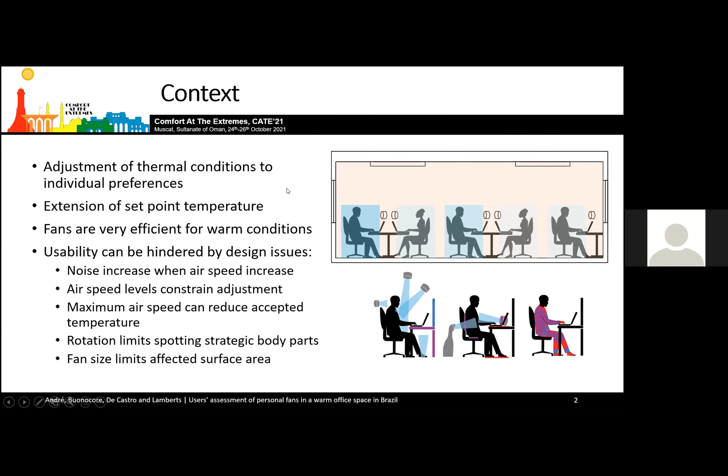So thanks for the opportunity for presenting this work. I will be presenting users' assessment of personal fans in warm offices in Brazil. The context of this work is the proposition of using personal conditioning systems in office spaces. This type of system allows us to adjust the thermal conditions to individual preferences. This way, we can adjust the microclimate around the person and its occupancy zone and extend the temperature of the room, allowing also to achieve some energy savings.

In this context, there are a lot of different types of personal conditioning systems that have been studied in the last 10 years more frequently. And for this study specifically, desk fans were chosen because in warm conditions, they seem to be one of the most efficient equipment to condition people in this kind of spaces. However, the approach used here is considering that design issues can hinder the usability of the equipment. So when we want to achieve a better thermal condition for the occupants and the extension of set point temperature of a cooling system, we have to assure that this usability won't be a barrier for its use.

So previous studies show that we can have some noise problems regarding the use of fans. Also, the maximum airspeed that the equipment can achieve can also limit the acceptable indoor temperature of a room. The vertical rotation of the equipment is also important if we consider that there are some spots of the body that we can direct it to reach a higher effect on the whole body thermal sensation. And also the size of the fan and its shape can limit the effect on the maximum surface area that we can reach.

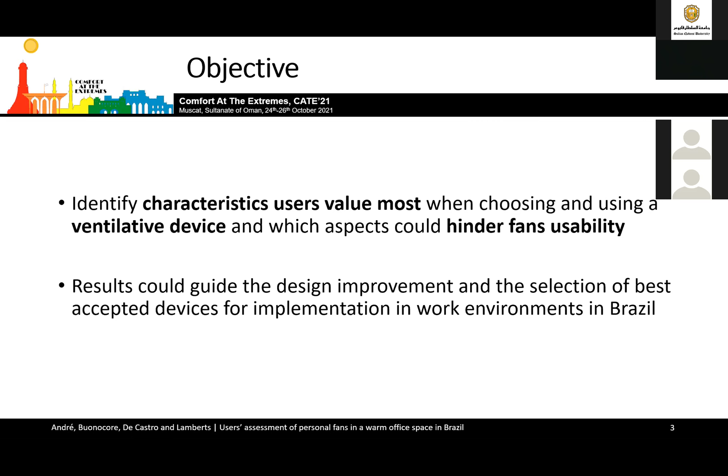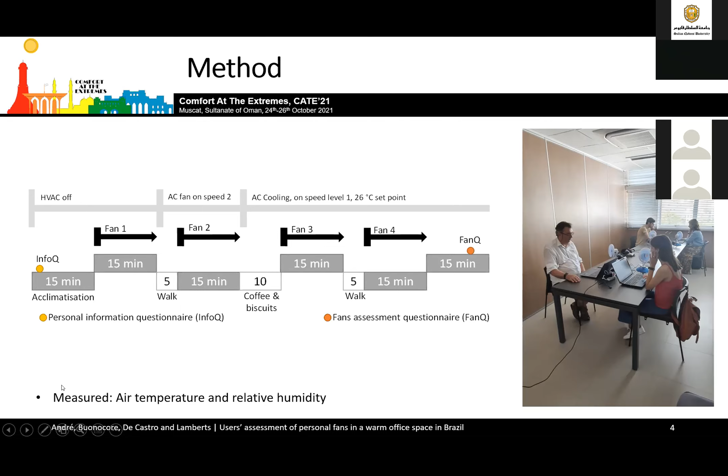And to do this, the study was based on an experiment in a controlled space. The experiment was performed with 4 people at a time, and they were asked during this experiment to use 4 types of fans during a similar period of time, and the conditioning of the space was changed during the experiment. Initially, we had like a dead band. Then the fans of the HVAC were activated, and at last the cooling system was activated with a 26 set point temperature. At the beginning of the experiment, they were asked to fill in some personal information in a questionnaire, and at the end, they were asked to assess these 4 fans by comparing them. Also, while the experiment was run, we were measuring air temperature and relative humidity.

These were the 4 types of fans that they were assessing. They were chosen regarding their differences in control opportunities, like the speed level. They had different types and numbers of speed level control. Also, the maximum airspeed of each of these equipment was different. The sound power was measured in a laboratory space, and they had also different dimensions, which is related to the airspeed and the surface that could be reached by the equipment. And they have also different aesthetics. And the last equipment, D, was an evaporative cooling device, so it was slightly different from the others.

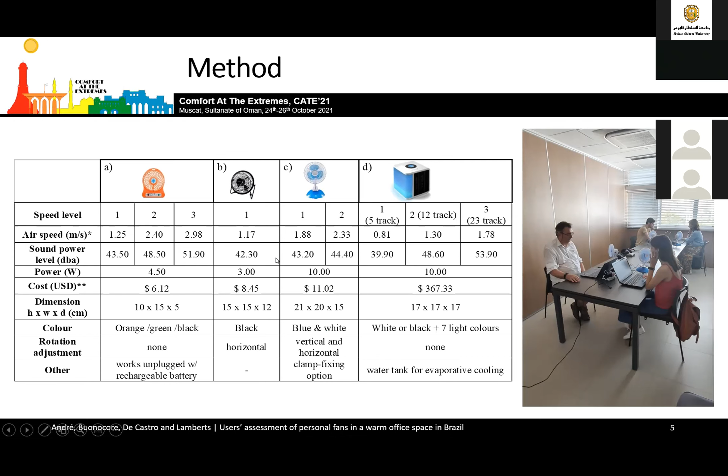The participants were chosen to be a very heterogeneous group. We have 40 participants, almost half were women and almost half were men, slightly more men than women. And they were separated by age groups, as you can see here. And also their BMI, their body mass index, was calculated afterwards with their anthropometric data. And we can see that there were more people classified as having a normal BMI than the other 2 categories.

And these were the mean indoor air temperatures and relative humidity. We had high, but not the highest temperatures that we can reach here in this region of Brazil. And also we had an average high relative humidity inside the room.

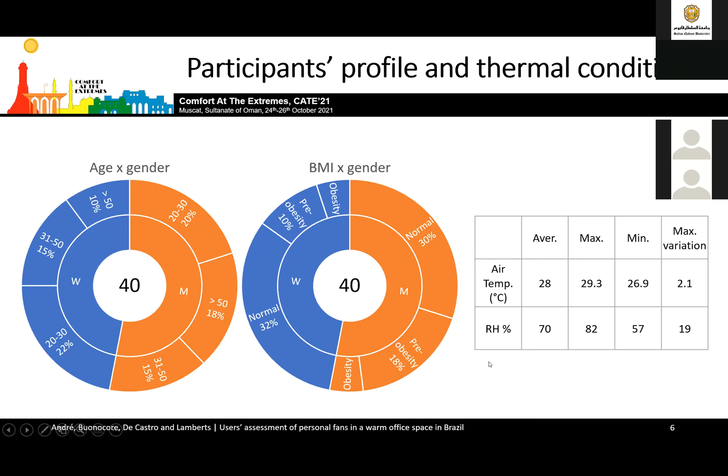So the initial results that I'm showing right now compare the previous willingness of the participants to use fans in their workspaces. And most of them tend to use air conditioning in their workspaces, and indicated they would prefer to use more natural ventilation. But there is a small sample that indicated they usually use fans or prefer to use fans.

And at the end of the experiment, we asked this question again: what do you prefer to use in your workspace? And we can see here that the experiment had a positive impact on the participants. A large group indicated they would like to have natural ventilation with fans, and a new group that wasn't included in these other graphics indicated they would be able or prefer to use desk fans with the air conditioning on. And this is very interesting because they weren't used to having this control mode, and they were considering this to be a preference at the end of the experiment.

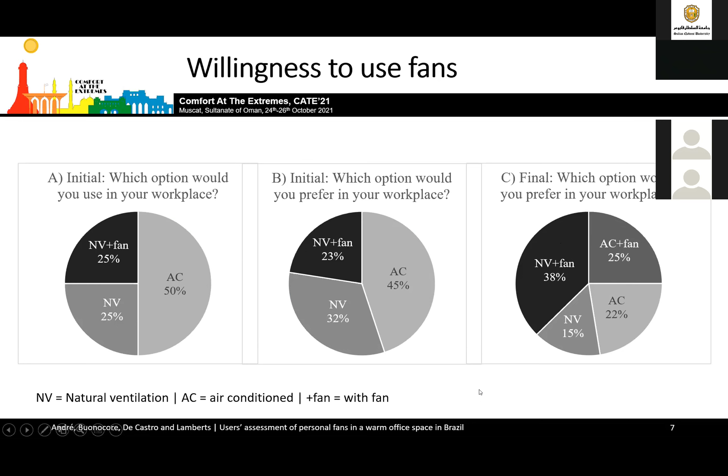The other important thing is the criteria they consider the most important. So this graph shows the rating of the criteria which they found most important. And we can see here that the top two are related to air movement and speed adjustment. This was expected considering we are assessing fans, but they also indicate noise level as the third most important. And we can see here rotation is an important aspect, and financial aspects were considered important too.

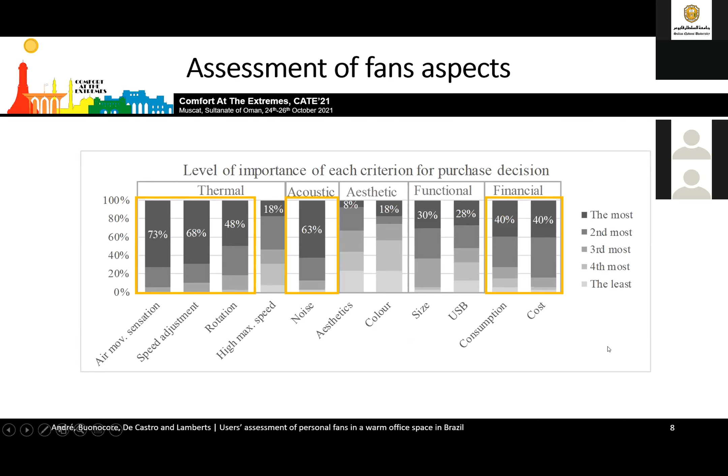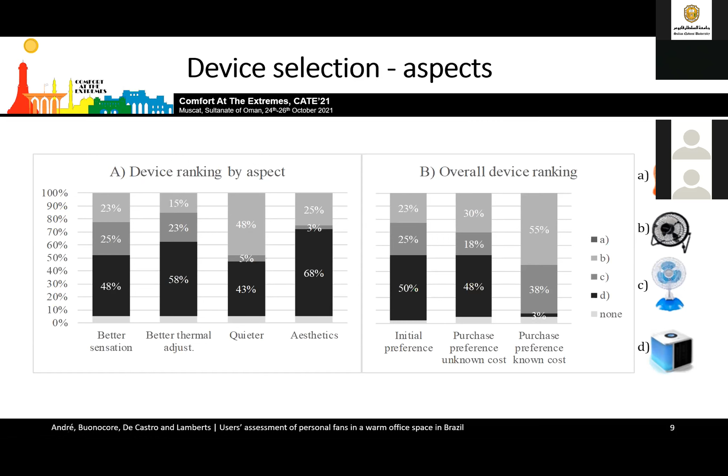And then to better understand this situation, we related this last choice, or the almost last choice, disregarding the prices, with the anthropometrical data. And we can see here some tendencies. Regarding the age, we can see that younger people prefer D and B, and fewer people prefer option C, and older people seem to prefer option C a little bit more than B.

Regarding the gender separation, we can see that men have a very equal preference regarding these three options, while women prefer option D more often in this sample. And the other part prefer option B. There is a small part of women that preferred option C. And regarding the BMI, we had a lot of people in the normal category. So most of them preferred option D or option B, and a lower number preferred option C.

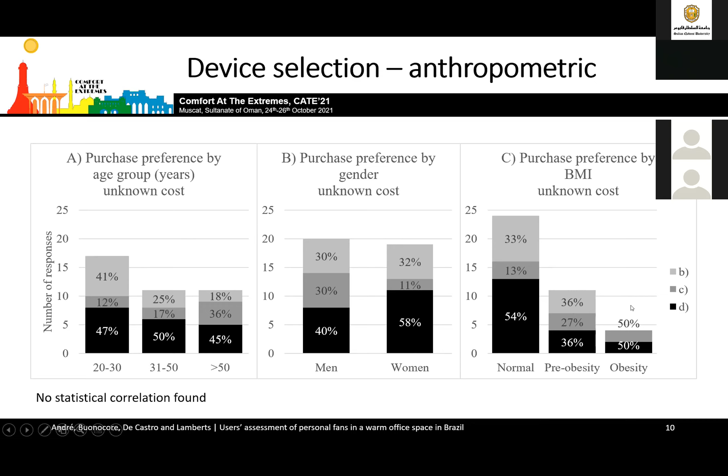No statistical tendencies regarding the anthropometric data. So we can affirm that option B and C could be applied to office spaces much similarly. So to wrap up, we found out that controllability aspects are very important in the definition of this type of equipment and their design. Also, higher speed wasn't considered so important as would be expected, and people preferred a smooth and controllable air.

The noise produced by the equipment is very important to be considered, and the financial aspect can be an eliminatory criterion if the occupant is also the owner of the equipment. And the possibility of using desk fans with air conditioning wasn't a usual condition for participants, but they considered this a good opportunity at the end of the experiment.

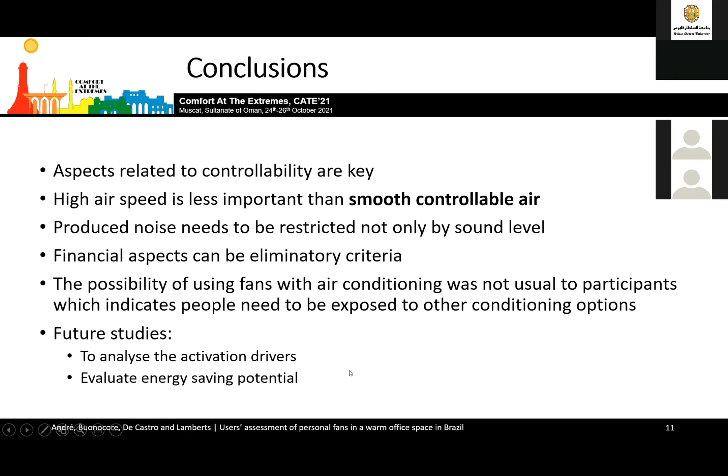So we think they have to be exposed to more options of control and control modes to be able to use that option too. And for future work, we will consider activation drivers that were included in the experiment. And we are also doing an energy savings potential analysis in another article regarding the use of personal fans.

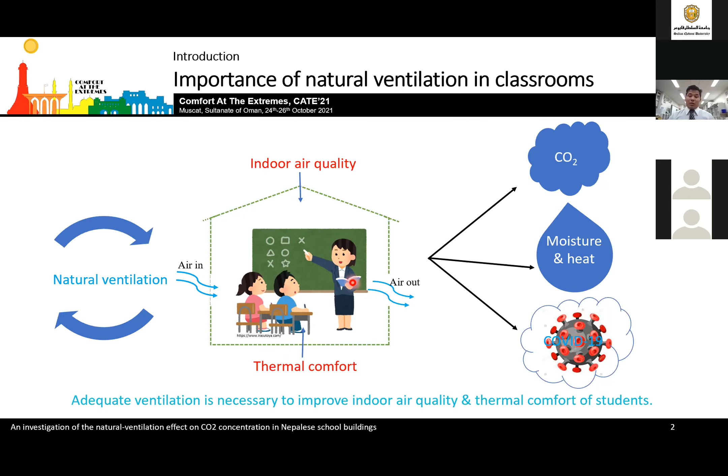Natural ventilation uses wind forces to let fresh air in and dilutes indoor air contaminants like CO2, moisture, and heat. Looking back at the 2020 academic year, until today we are suffering from the COVID-19 pandemic, and school communities were closed to reduce the risk of COVID-19. It is said that natural ventilation could be an effective on-site sustainable mitigation strategy to be safe from such diseases, improve indoor air quality associated with CO2 concentration and ventilation, and improve the thermal comfort of the students.

In the context of Nepali school buildings, most rely on natural ventilation. No heating and cooling systems are provided in the classrooms, and windows are the major source to ventilate the air. As shown in the pictures, just big windows are provided in the classrooms. In those classrooms, CO2 concentration and ventilation associated with indoor air quality have not been studied to date.

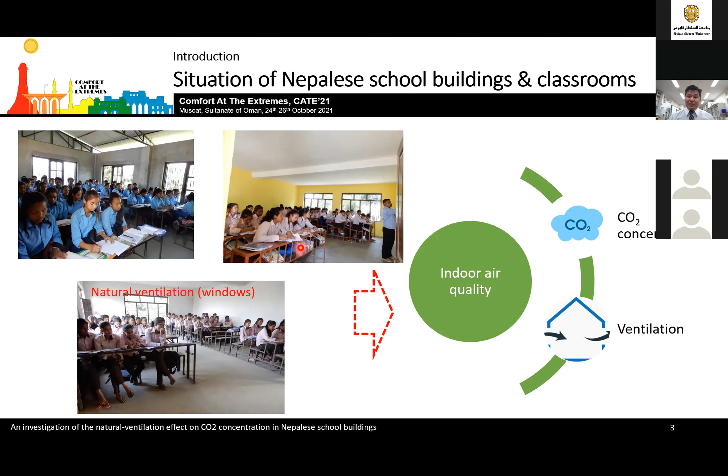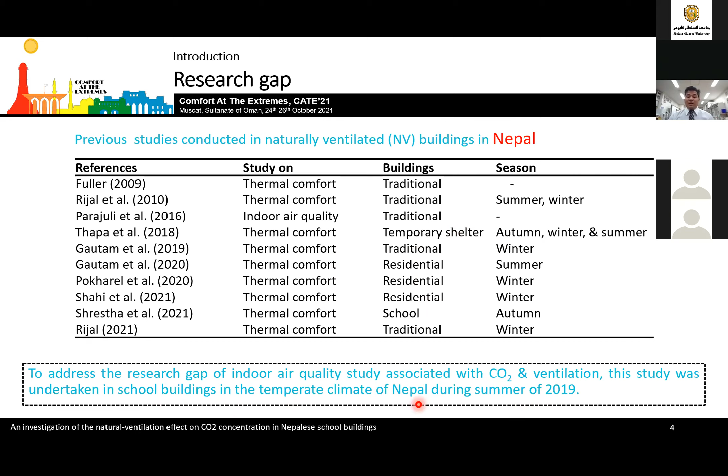Most of the studies conducted in Nepal are focused on thermal comfort in residential buildings. Very limited studies on thermal comfort in school buildings can be found, and no studies on CO2 concentration and ventilation are found in the Nepalese context. Therefore, to address this research gap, this study was undertaken in school buildings in the temperate climate of Nepal during the summer of 2019 with the following major aims.

In this study, based on the CO2 data collection, we analyzed the data. We have developed a model, and using this model, we estimate the ventilation rate and air change rate, and use it to estimate the CO2 concentration. Finally, we compare the measured CO2 concentration with the estimated CO2 concentration to check the model developed in this study.

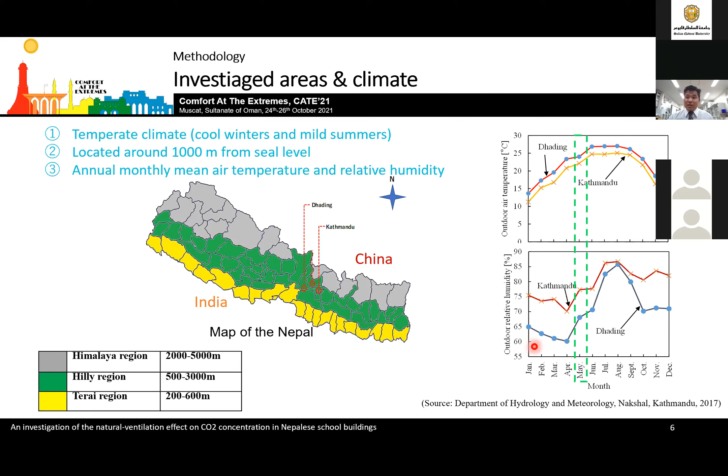This shows the map of Nepal, and the study was conducted in schools located in 2 districts in the temperate climate of Nepal. This diagram shows the monthly mean air temperature and relative humidity of the investigated areas. The hottest months are from June to September, and the temperature reaches its minimum from November to January. This study was conducted in May of 2019, and 3 schools and 7 classrooms were investigated, and all schools were naturally ventilated.

No heating and cooling systems were provided in those classrooms, and students from grades 8, 9, and 10, aged 12 to 18, participated in this study. This plan view shows the characteristics of the investigated classrooms in 3 schools, 7 classrooms, and the occupancy of the students was different from classroom to classroom, and the number of windows was also different

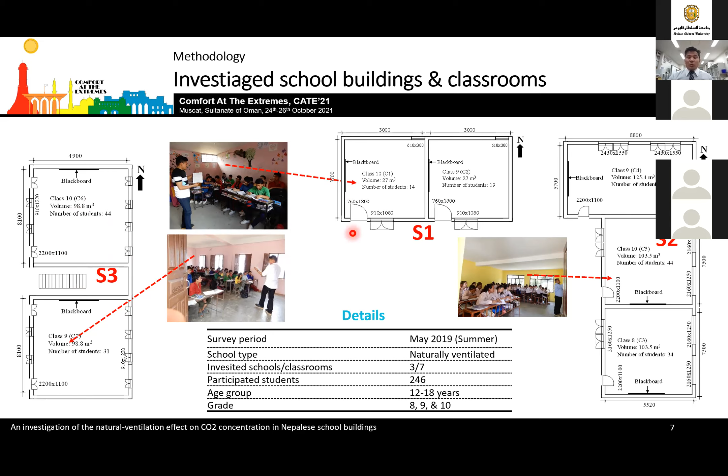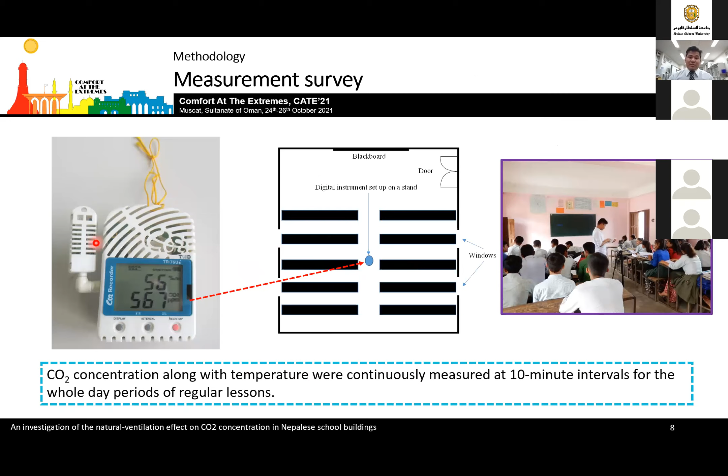from school to school. In this type of classroom, we measured CO2 concentration along with temperature at 10-minute intervals for the whole day period of regular lessons using this kind of digital instrument. In this study, we developed a model using a transient mass balance equation. The basic principle is that the CO2 going in and the CO2 emitted by the students must be equal to the CO2 stored inside the classroom and the CO2 going out. This is the very basic principle of mass balance.

Using this equation, we reduced it to an explicit type of equation, and we developed 2 equations, equation 1 and 2. Equation 1 is used to estimate the time-varying air change rate, and equation 2 is used to estimate the CO2 concentration. For equation 1, there is a constraint for time. The time period must be very small, and in our case we took a 30-second time interval.

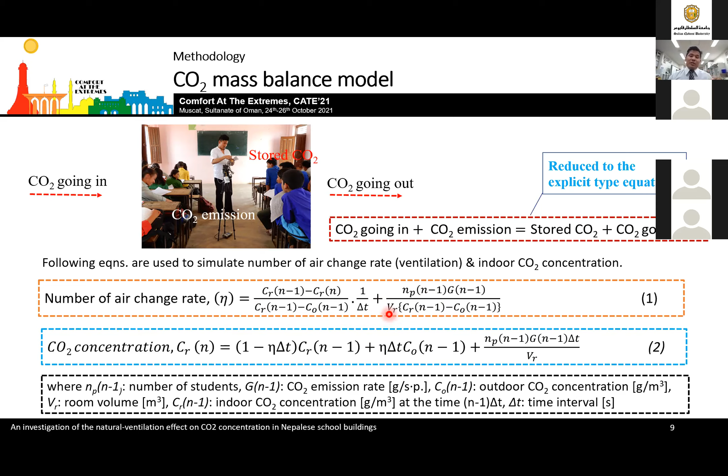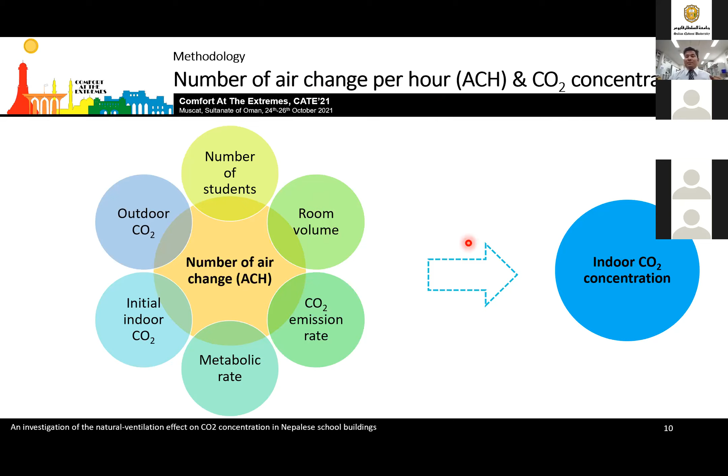To estimate the number of air changes per hour, we used these 6 factors: number of students, outdoor CO2 concentration, initial indoor CO2 concentration, metabolic rate, CO2 emission rate, and room volume. Using these 6 factors, we estimated the air change rate, the ventilation, and we used it to estimate the indoor CO2 concentration.

Here are our results. The first figure shows temperature versus time in 3 schools, 7 classrooms, and outdoor temperature and indoor globe temperature are plotted here. From these 3 graphs, we can see that the outdoor temperature is very close to the indoor globe temperature, and the temperature increases, becoming higher during the daytime.

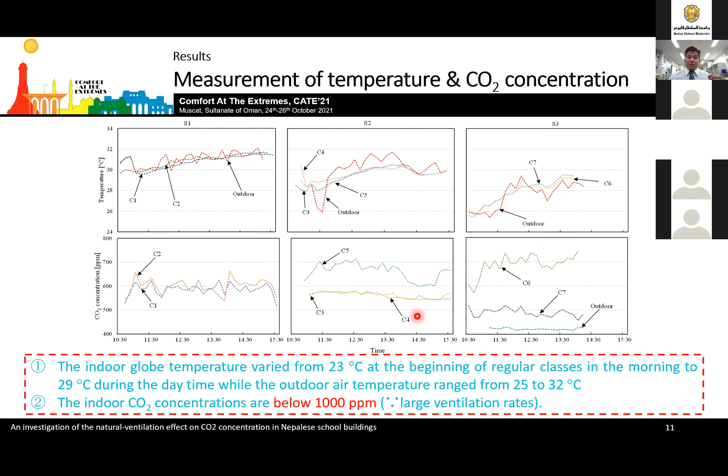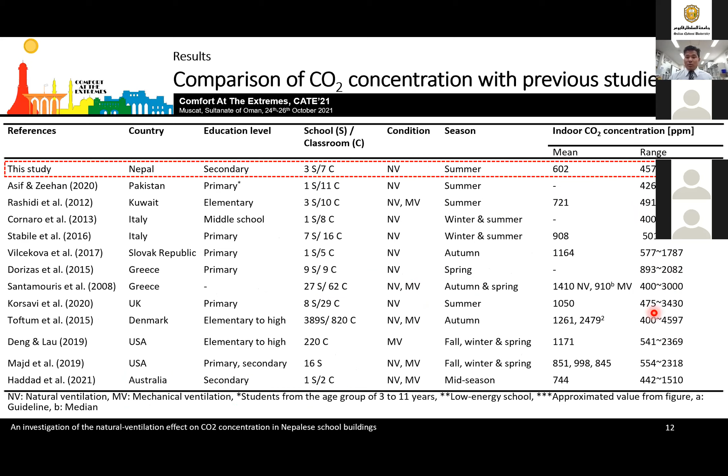The second figure shows the CO2 concentration versus time. In 3 schools, 7 classrooms, we found the CO2 concentration was below 1000 ppm. This must be because of natural ventilation and large ventilation rates, as I explained before, just open windows, and also cross ventilation may be the reasons for such low indoor CO2 concentration. Compared with previous studies, we found a very low range of CO2 concentration in the investigated school buildings. In previous studies, even when naturally ventilated, CO2 concentration was found higher than 2000 ppm.

For example, in school 3, both classrooms C6 and C7 are similar in dimensions, shape and size, but the difference is only in occupancy. In C6 there was higher occupancy in comparison to C7. Higher occupancy is connected with more CO2 generation. More occupancy, more CO2 generation. So more CO2 generation indicates the ventilation rate is low. That is one of the reasons for school 3.

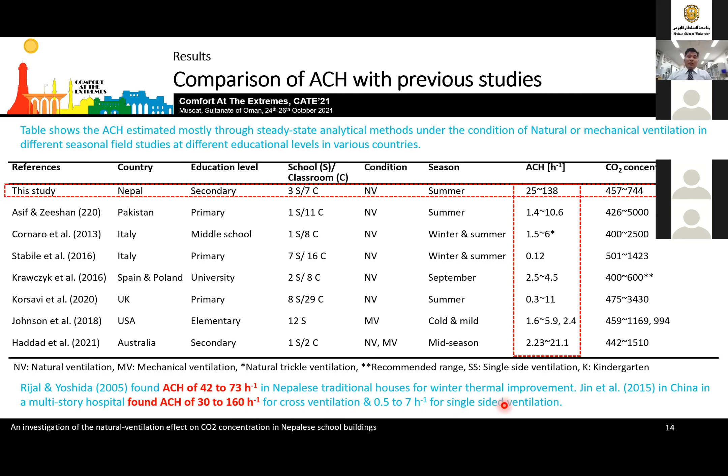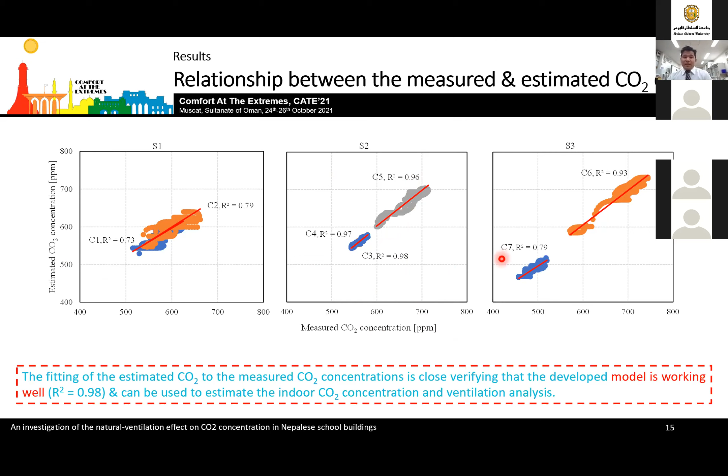And this model can be used in the future for further study and analysis. And here are our conclusions. The measured result showed that the indoor CO2 concentrations were within the acceptable limit. This shows that Nepalese school buildings have the potential to provide appropriate indoor air quality associated with ventilation and CO2 concentration. And the ventilation rate was higher than 25 times per hour.

And this showed that the investigated Nepalese school classrooms have the potential to provide adequate ventilation during the summer season. However, for the winter season, it may not be suitable for the students. Such high ACH or ventilation could be problematic to the students. Therefore, the winter season needs to be investigated in the future.

And last, the estimated indoor CO2 concentration fit well with the measured CO2 concentration. This confirmed that the method developed is accurate for the estimation of CO2 concentration and ventilation analysis. Overall, the findings of this study should be useful not only for Nepalese school buildings but for those located in climates similar to Nepal, for the evaluation of the indoor air quality associated with CO2 concentration and

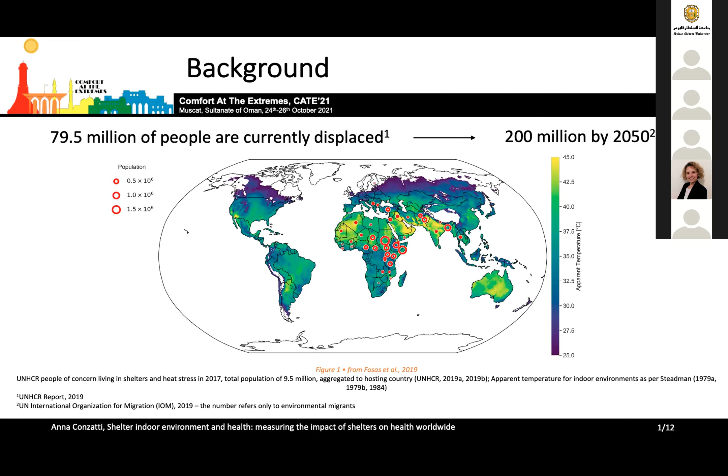represents comfortable conditions. The image from a recent study by Fosas showed the distribution of UNHCR people of concern living in shelters and heat stress, and it's evident that the majority of households living in shelters are subject to high levels of heat stress. However, heat stress is only one of the risk factors that jeopardize refugees' and IDPs' health, because, for example, harsh climatic conditions, lack of WASH facilities, and poor shelter quality are important determinants of health, especially in

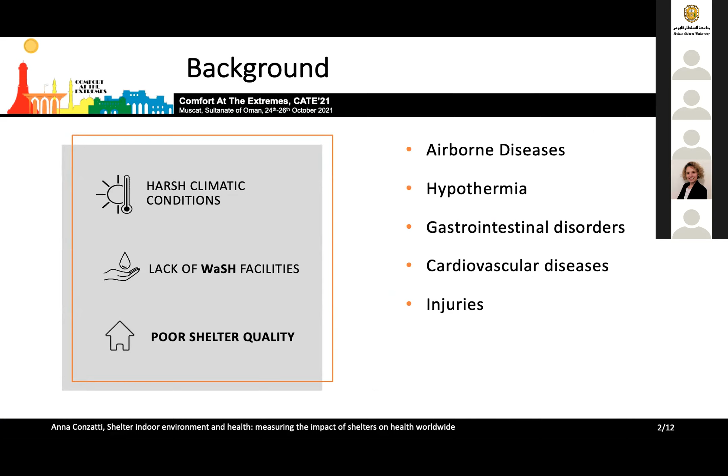the case of displaced populations, where these factors contribute to the development of specific health diseases, such as airborne disease, hypothermia, gastrointestinal disorders, cardiovascular issues, and injuries, all of which result in a reduced life expectancy, especially for children under 5 and the elderly. From a preliminary review of the literature, it has been clear that very little has been done to address the link between shelter and health.

Therefore, a bibliometric and systematic literature review followed by a comparative review has been conducted. The results of the bibliometric review have shown that there are 4 main clusters of research concerning shelter and health. Existing literature has also observed that shelters are fundamental determinants of human health, and they present some issues related to certain health diseases. For example, overcrowding was mainly related to sleep deprivation and in general any infectious disease, and air quality was related to respiratory infection, which represents a threat, especially for children under 5. Very little is known about the relationship between extreme temperatures in shelters and health.

Shelter generally consists of a single room where all the activities take place, such as cooking and sleeping. Therefore, indoor air quality can be poor due to the presence of cooking fuel or dust, and moreover, due to low airflow rates and the lack of pipes or chimneys. All of these factors determining poor air quality are also interdependent.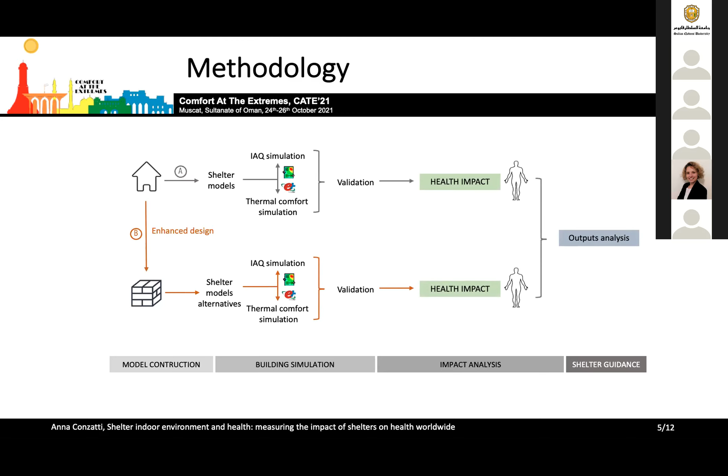For this preliminary study, shelters in Hitsats refugee camps have been monitored for 15 days. Temporary shelters constructed in Hitsats were rectangular shaped and constructed with hollow concrete block walls and corrugated galvanized iron roof. Both the door and the window on the same side had CGI shutters and were usually kept closed during the night due to the fear of theft and security reasons.

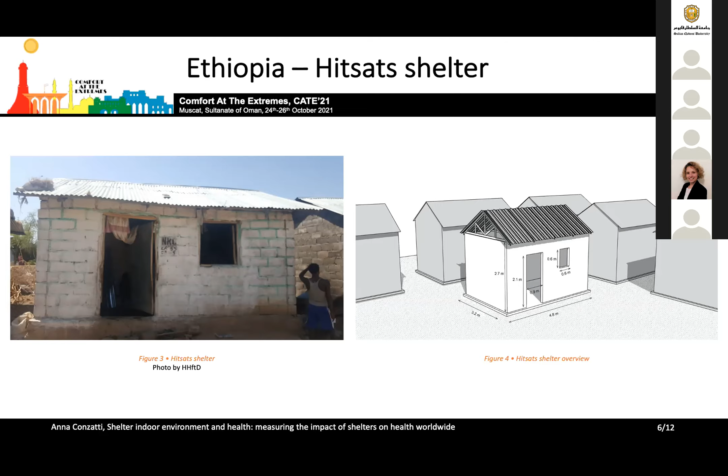Furthermore, due to the lack of overhanging shades over windows, some families had to close the windows during the day to avoid direct sunlight inside the shelters. Therefore, they reduced the amount of airflow inside the shelter. And this study assumed that the window is open during daytime and closed during nighttime. Because windows were kept closed during the night, ventilation rates were assumed to be approximately the same as infiltration rates.

The study focused on Hitsats refugee camps because shelters in that area were highly overcrowded and refugees used to cook indoors using traditional charcoal stoves several times during the day. And they also used to shut windows during night and occasionally during daytime. Besides, the camp was exposed to the hot desert climate and refugees reported living in discomfort.

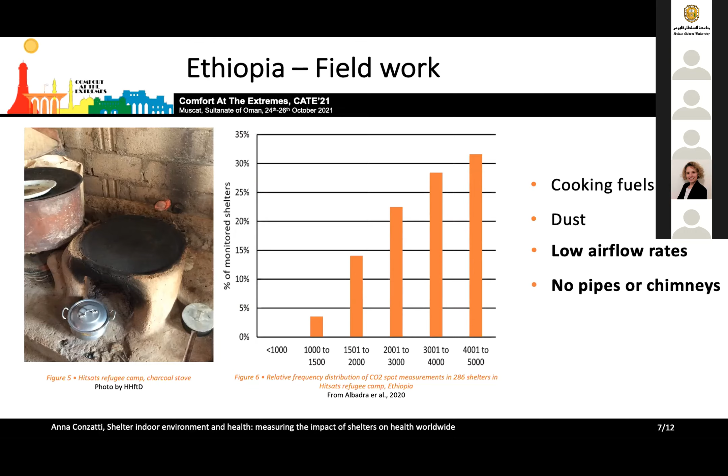Therefore, CO2 has been measured for 15 days, and during the field work it has been observed that poor levels of air quality were mainly due to cooking fuels, dust, low airflow rate, and absence of pipes and chimneys. These two last factors are the most important when investigating the impact of shelter design on human health.

The ideal procedure for obtaining a comprehensive analysis of indoor air quality involves recording all the indoor contaminant concentrations through the use of sensors and the direct monitoring of pollutants emitted by the source of cooking. However, in that case, owing to the unpredictability of field work in refugee camps, such as limited access time and mistrust in monitoring equipment, these procedures were too expensive and not adapted to extreme locations such as refugee camps.

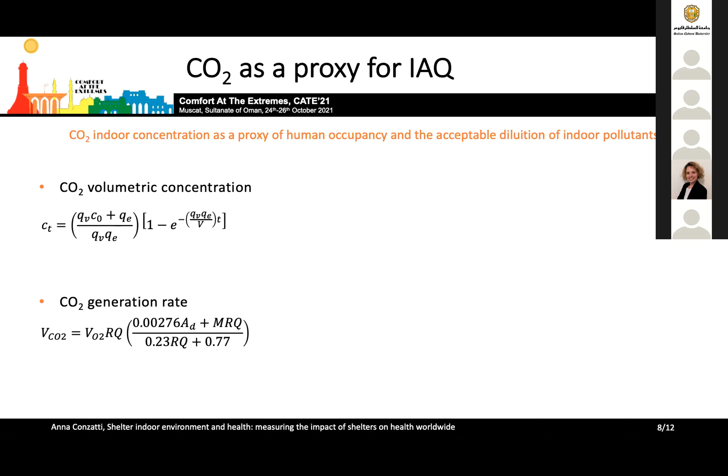Therefore, a simplified approach using ventilation effectiveness to identify the acceptability of indoor air could be suitable when working in displacement settings. So the study was performed using CO2 indoor concentration due to occupancy as a proxy of ventilation rate. Then, through the use of building simulation, it was possible to construct a model of the shelter in Hitsats, predicting the shelter behavior in terms of indoor air quality and pollutant concentration, as well as thermal comfort.

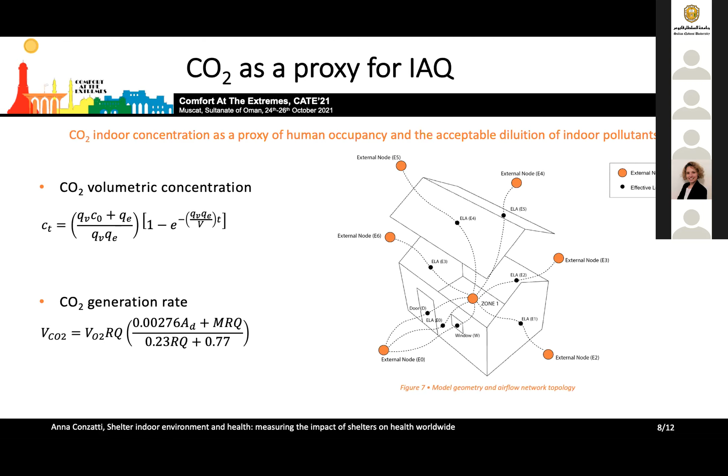So preliminary results show a comparison between two shelter models, the control shelter and the shelter with an improved airflow. And the control shelter shows that shelters do not provide the minimum air exchange to maintain the maximum permissible CO2 concentration level as per ASHRAE, so it's 1,000 ppm. Therefore, occupants are exposed to excessively high levels of indoor pollutants, and they are potentially exposed to indoor air-related health issues, especially during nighttime, when the windows are shut.

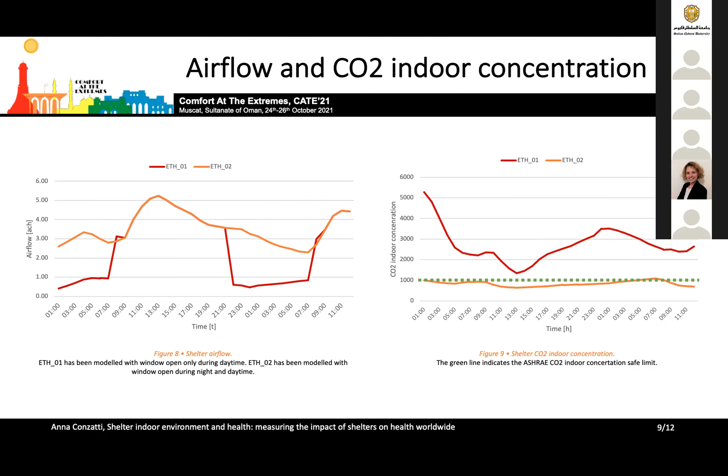However, as can be observed from the orange line, by applying simple design improvements, the airflow can be enhanced and the levels of indoor pollutants reduced. For example, increasing the airflow rates during the night seems to be one of the possible solutions to reduce the indoor concentration of CO2 and provide a healthier indoor air quality. To provide higher ventilation rates, it would be possible to maintain the window open during the night, preserving security and privacy of refugees, for example, by adding a net or a steel bar to the window.

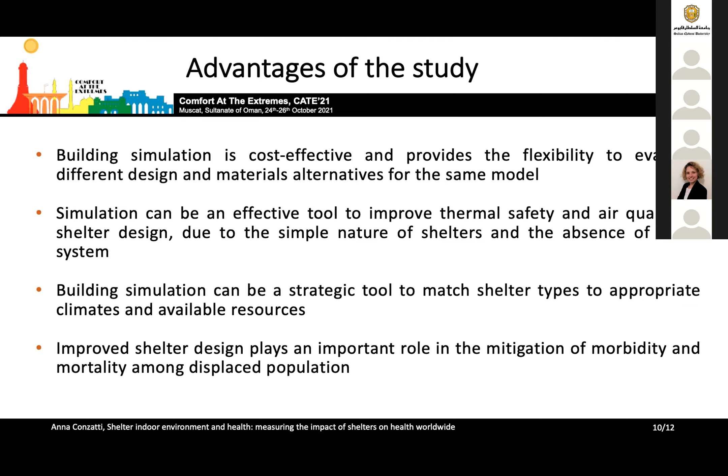The use of building simulation to analyze the indoor air quality presents some advantages. Firstly, building simulation is cost effective and provides the flexibility to evaluate different design and material alternatives for the same model. And this is advantageous, especially in the field of shelter design.

However, this study presents some limitations, mostly related to the building simulation, which is an uncertain science. Simulation results, in fact, depend on the input data, which in the case of shelters may be difficult to find. And as well, estimating the airflow rate from carbon dioxide concentration may be problematic, especially for naturally ventilated dwellings, as ventilation rate is affected by several environmental parameters.

And additionally, finding a link between a particular shelter design to specific health disease is challenging due to the lack of information about households and health status. Finally, future studies should continue to investigate the role of CO2 concentration as an assessment of ventilation. And in refugee settings, future studies should include the study of indoor pollutants resulting from indoor cooking using solid fuels, which are well known to be a threat to human health.

And therefore, future direction should investigate more deeply the impact of shelter design on indoor air quality, also considering thermal comfort. Thank you for your attention.

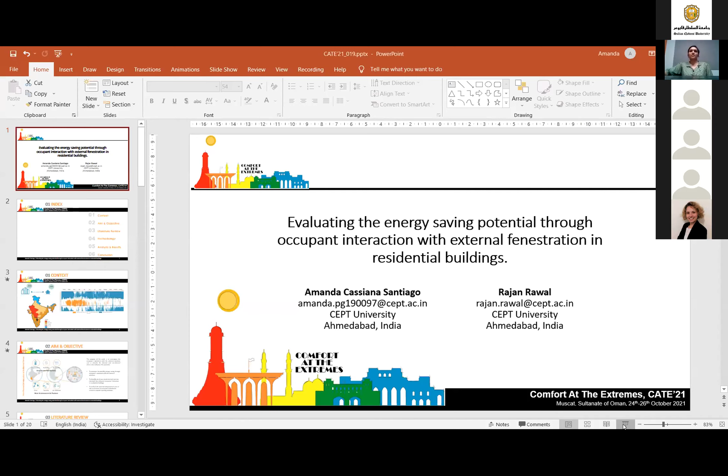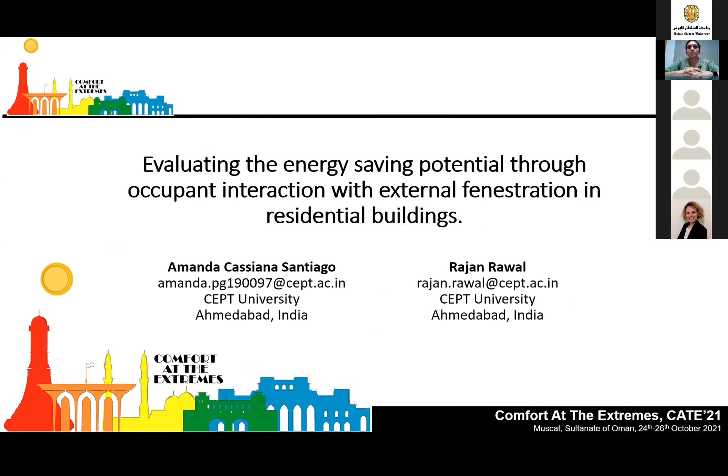Well, a very good afternoon to all of you. I'm Amanda Santiago, and my topic is evaluating the energy saving potential through occupant interaction with the external fenestration. I was guided by Professor Rajan Rawal from CEPT University. In today's presentation, I will be covering a context to give you all a bit of understanding of the climate that we were up against, the aim and objective of this study, an extensive literature review, followed by the methodology, and then the analysis and results, and finally the conclusion.

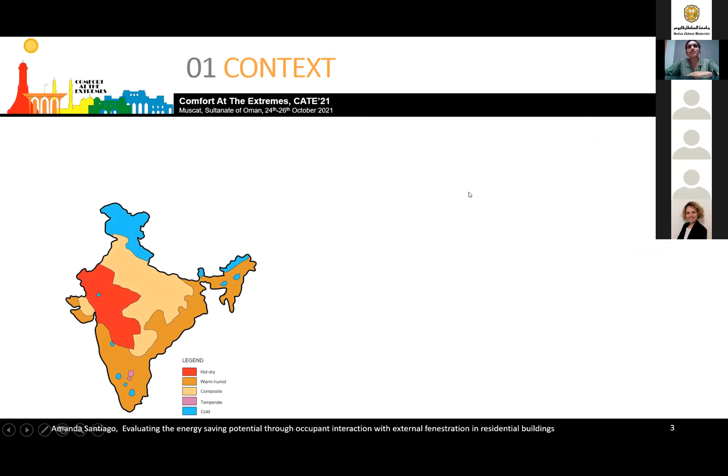In India, buildings account for 35% energy consumption, of which 20% is from residential buildings. Bangalore has a comfortable indoor environment through natural ventilation for most part of the year. The chart alongside is from the National Building Code's IMAC model. As you can see, the portion in white is the area fit for natural ventilation. Now, despite Bangalore having a comfortable indoor environment, the study goes deeper to understand why people in residential homes in Bangalore keep their windows closed for most part of the year.

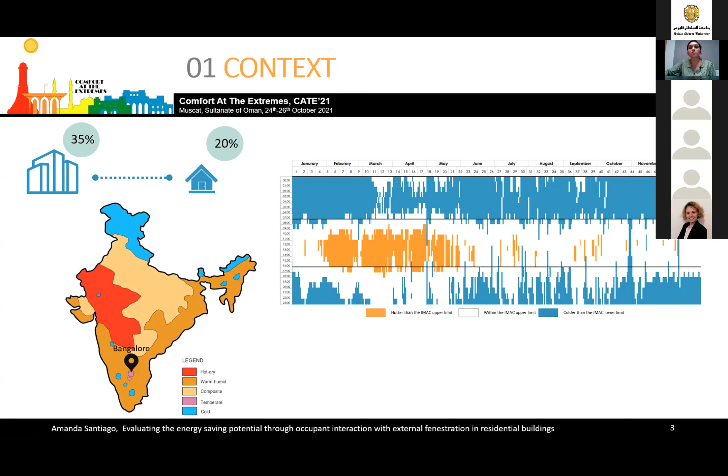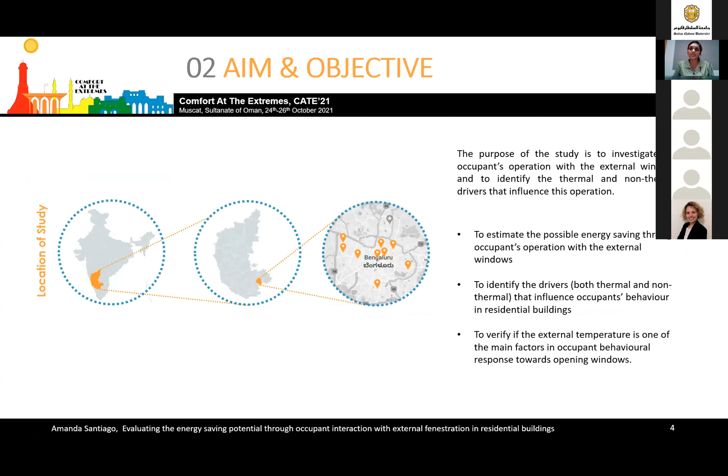Knowing the climate of this space, the purpose of the study was to investigate the occupant operation with the external fenestration and to identify the thermal and non-thermal drivers that influence this operation. What kind of drivers are we looking at? The thermal drivers are basically environmental factors such as temperature, humidity, and air quality. The non-thermal drivers are non-environmental factors, which basically pose a hindrance while opening your windows. That's pests, security, air pollution, etc.

An extensive literature review was conducted of nearly 35 papers, from which it can be known that occupants have a profound effect on the indoor climate and energy consumption of a building. The crucial point lies in the fact that occupant behavior cannot be determined. However, a set of common tendencies can be observed. In 2011, Andersen et al. conducted a survey from which they understood that it is necessary to have the indoor and outdoor conditions be known while trying to understand occupant behavior, and hence data monitoring is necessary.

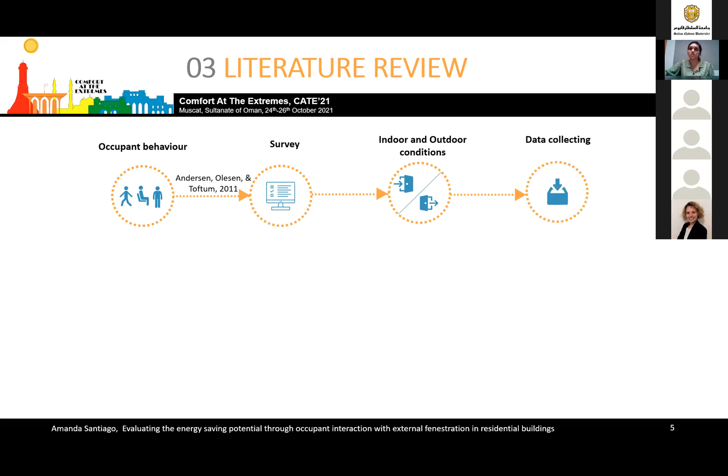In 2017, Yao and Zhao conducted a study which also included data collection plus the survey, and they understood the importance of monitoring the window status. There are various ways in which the window status can be monitored. In 2013, Andersen et al. used a magnetic induction strip to determine the status of the window. However, the extent to which it was opened could not be determined. This was overcome by Adorkor in 2014, in which he used image capturing to determine the window status.

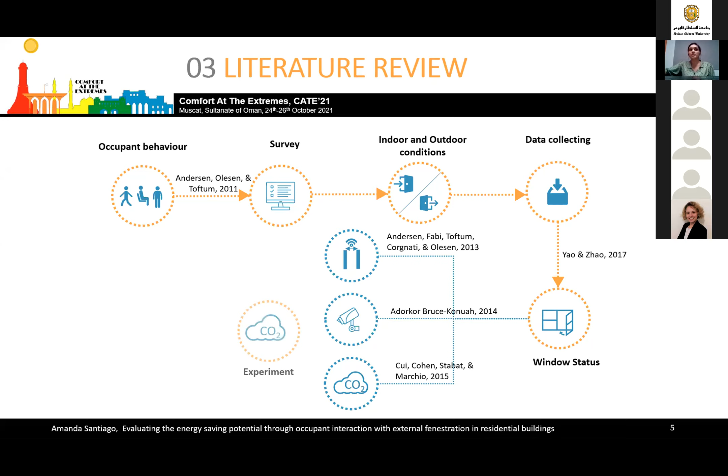However, the learning from his study was that when the blinds were closed, the window status could not be determined. In 2015, Cui and Cohen used CO2 tracer gas to determine the ACH and find the status of the window. Our study uses a similar experiment. There have also been various complex simulation models to estimate and predict the window opening. Our model is rather simple and only focuses on the possible savings that can be adapted from this study.

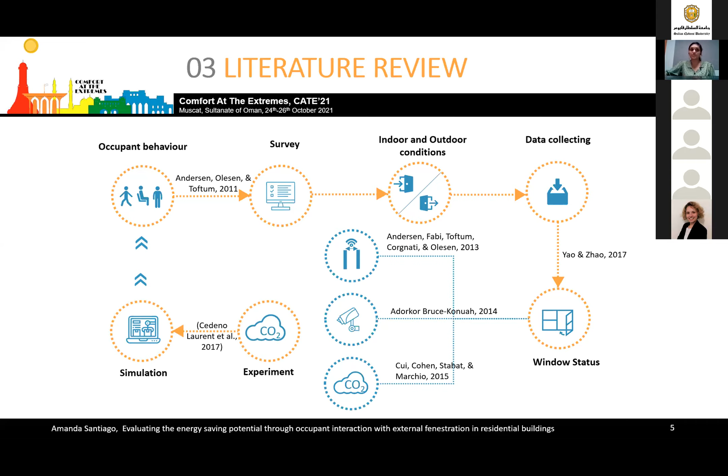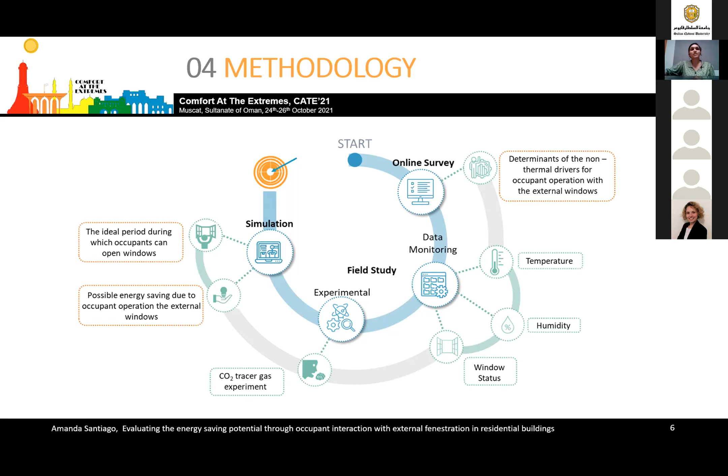The methodology followed is basically of three broad categories: the online survey, a field study consisting of data monitoring, and simulation, which allows us to find the ideal period for when people can open their windows and a possible energy saving by them doing so. Now, what can be understood from this methodology? I'll describe each in detail.

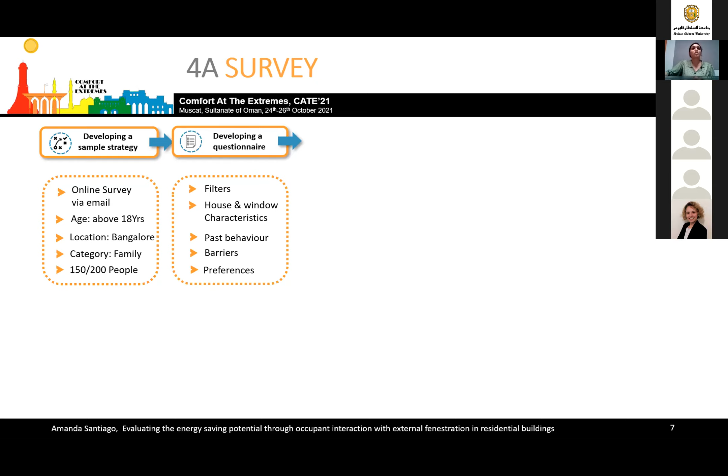First is the survey. The survey was developed by a strategy. The survey was online in nature. It catered to 18 years and above, and it was restricted to the location of Bangalore in India. It reached out to 150 to 200 people. While developing the questionnaire for the survey, there were filters that were put into place, followed by the house and window characteristics, the past behavior of the occupant, barriers that the occupant faced, and preferences of the occupant.

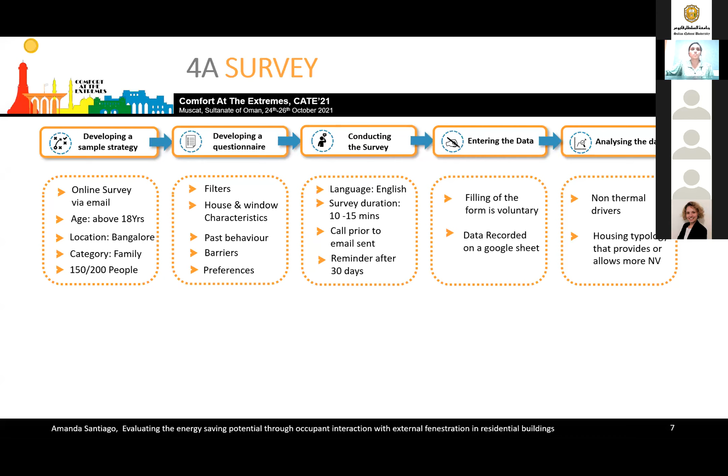While conducting the survey, it was ensured that the survey was in English for a duration of 10 to 15 minutes, and prior to the survey being sent, a call was placed, and also a reminder 30 days after. On entering the data, it was known that filling the form was completely voluntary, and the data recorded was recorded in the form of a Google Sheet. Now, the outcome of the survey was mainly to understand the thermal and non-thermal drivers, mainly to identify the non-thermal drivers on a large scale.

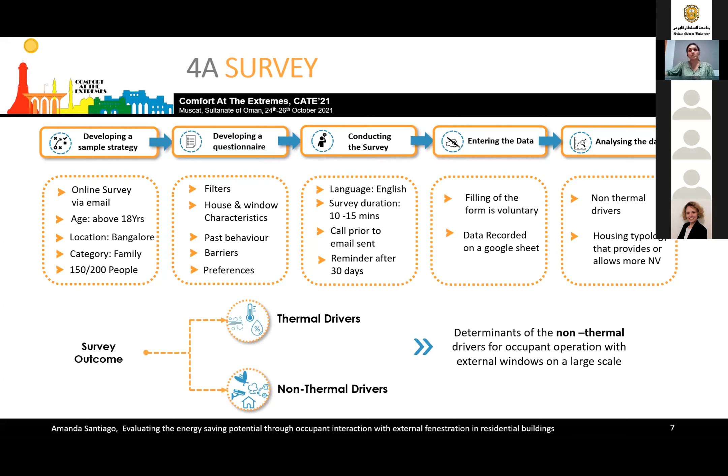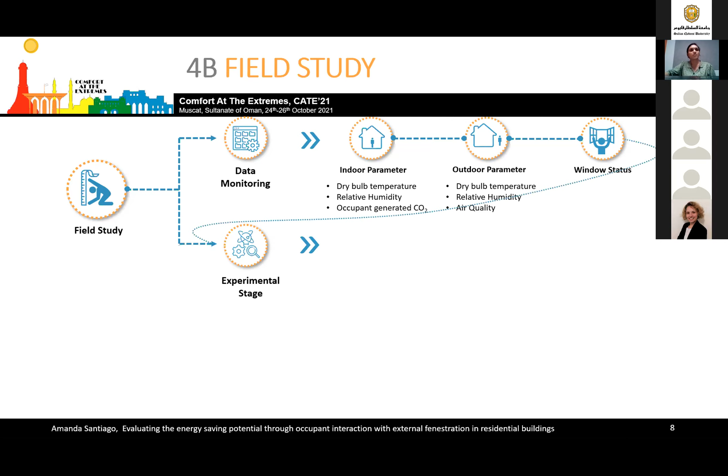The next stage was the field study. The field study consisted of two parts: data monitoring and experimental stage. The data monitoring consisted of indoor parameters, outdoor parameters, and window status. The indoor parameters included the dry bulb temperature, relative humidity, and occupant-generated CO2. The outdoor parameters had the dry bulb temperature, relative humidity, and air quality. In order to determine the window status, the experimental stage was used, in which CO2 tracer gas experiment was used as a proxy to determine the opening percentage of the window.

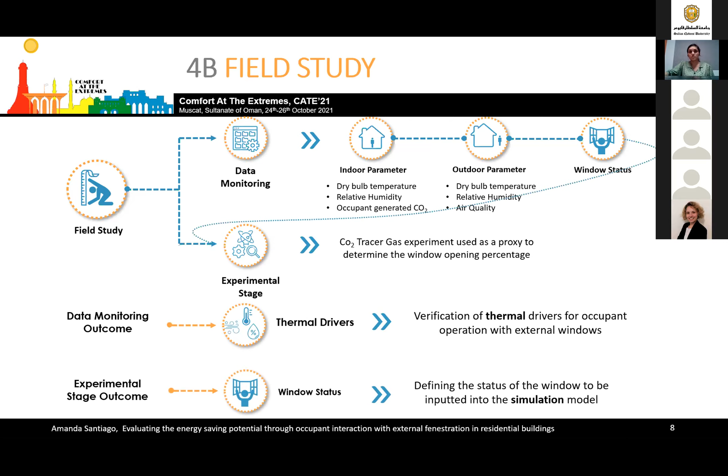The outcome of the data monitoring was to verify the thermal drivers that influence the opening, and also the experimental stage outcome was to define the window status. This window status was put into the simulation model. The final stage of the methodology was the simulation. The simulation was done in two cases. One, which was mainly based on DesignBuilder's differential temperature variation algorithm, and the second, in which the operation schedule was based on the opening data collected on site. The opening data collected on site was of three categories: active user base, passive user base, and mixed user base.

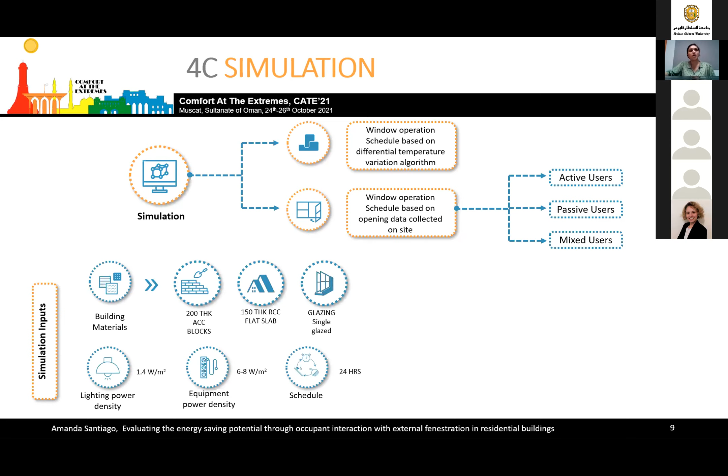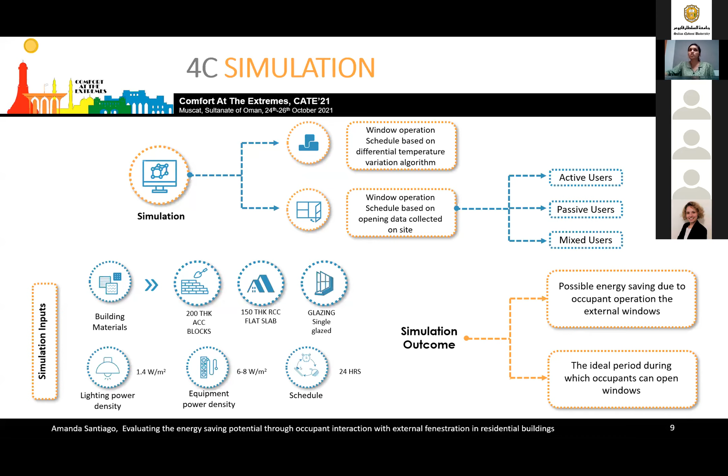Now, the inputs for the simulation model, the building materials, were taken from the GBPN report. The lighting power density, equipment power density, and schedule was taken from the data collected on site. The importance and the outcome of the simulation was allowing us to identify the ideal time in which people could open their windows, and also the possible energy savings in them doing so.

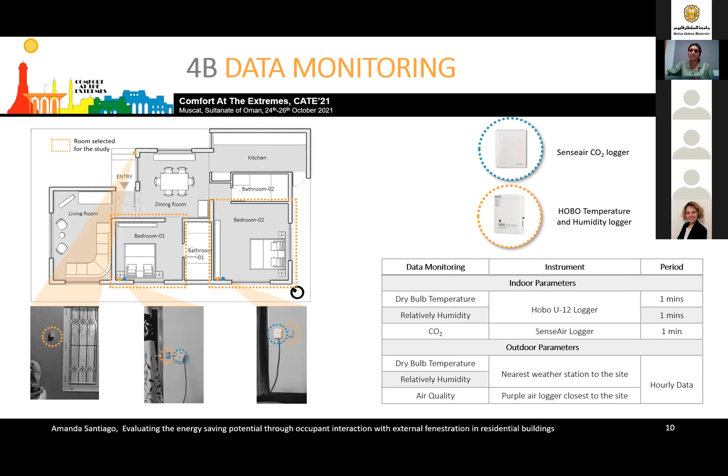In addition to this, the data from the nearest weather station was collected, and the air quality from an open source PurpleAir logger website was taken. These, which were taken online, were ensured to be within a kilometer radius from the site. The experimental stage. The experimental stage was conducted to understand the status of the window.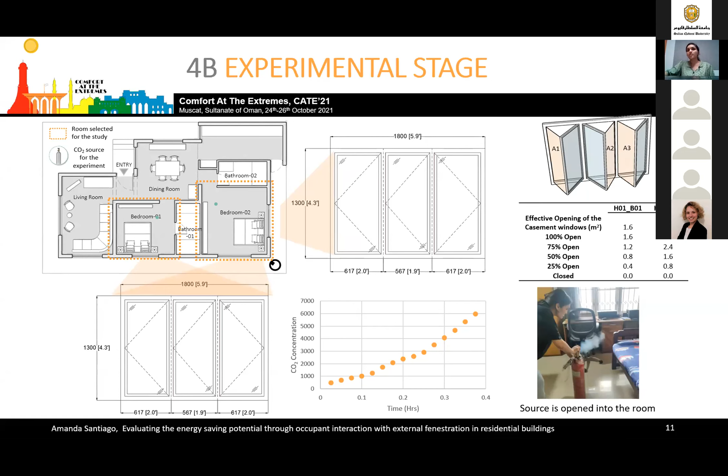In this case, it's a CO2 cylinder. After opening the CO2 cylinder, the concentration of the room was allowed to reach 5,000 ppm as per the ASTM guidelines, after which the source was taken out of the room and the fan was switched on to ensure circulation, ensuring 5,000 ppm was maintained. Finally, windows were opened and the decay was observed. This decay was then matched with the occupant-generated CO2 that was collected daily.

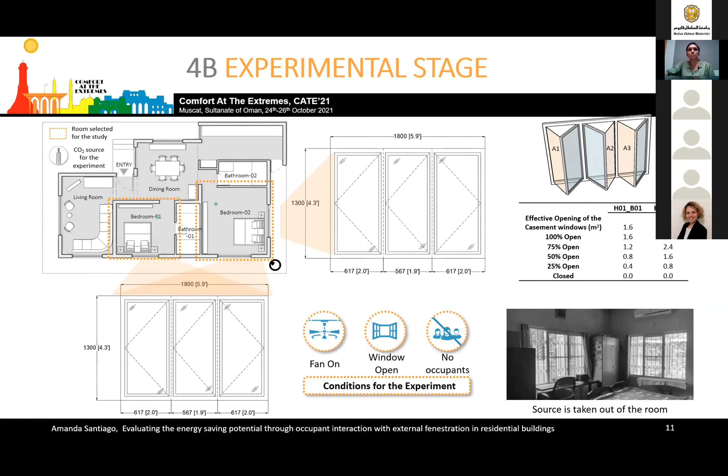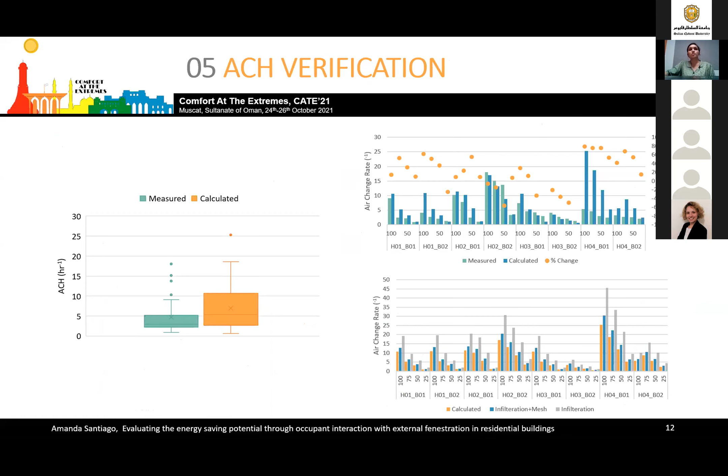Now, to verify the ACH that was collected, we used the leakage guide to calculate the ACH. As you can see, the measured and the calculated ACH varies between 2 to 5 ACH. On verifying the ACH, the schedule for all the 9 houses, that's the 18 bedrooms, was plotted. The schedule was taken into 3 main categories: active user base, in which occupants open their windows a lot; passive user base, in which occupants hardly open their windows; and mixed user base, which was a combination of active and passive.

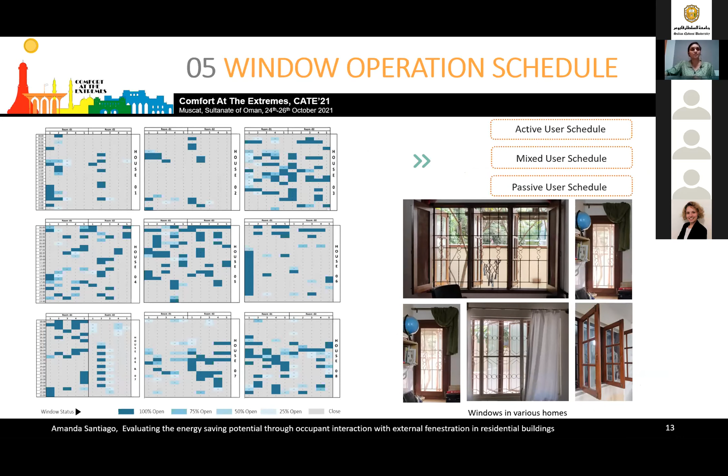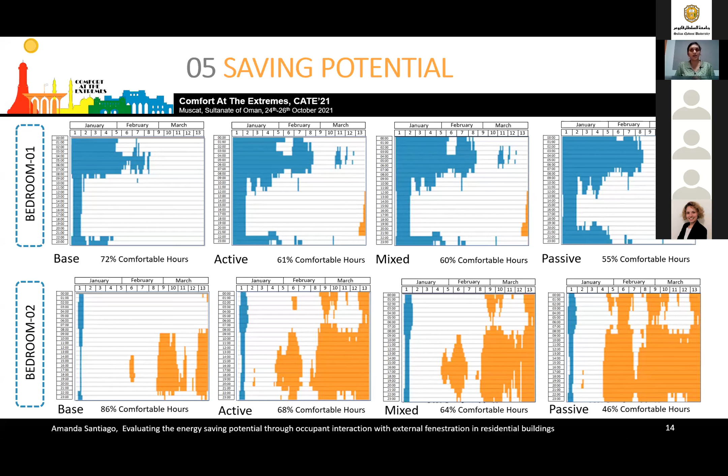Now, on understanding the energy savings that were possible, these were put into the simulation model. The base case was designed with the temperature variation algorithm, from which we achieved 72 to 86 comfortable hours. As you can see, there's been a reduction on comparing it with the passive, mixed, and active user base.

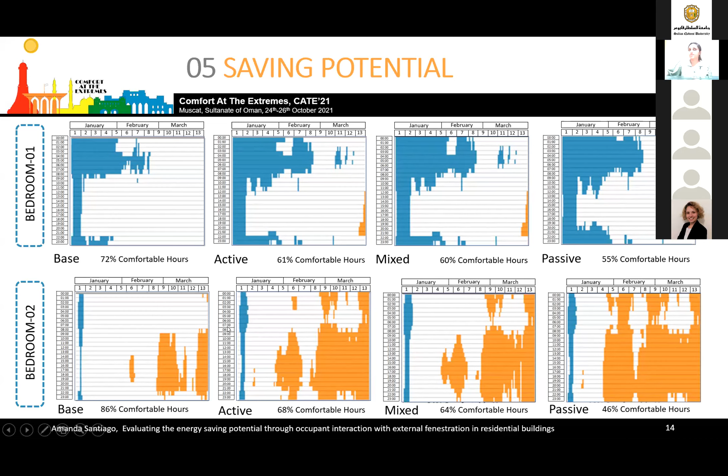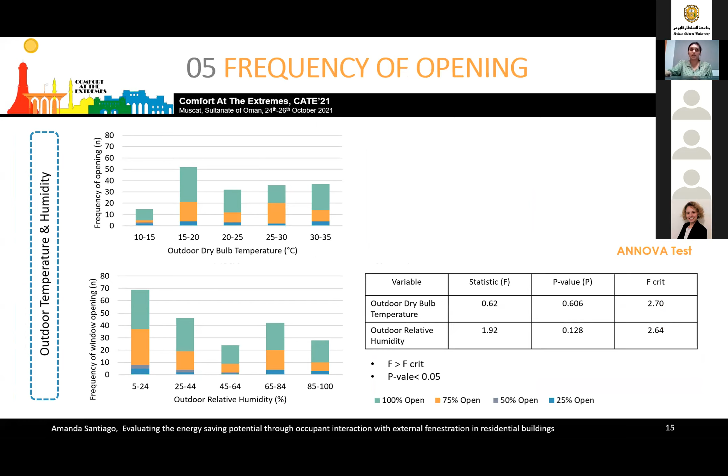Now, in order to understand what could be the thermal drivers in this kind of a situation that led to the reduction in comfortable hours, we did an ANOVA test to understand the relationship of the opening with the outdoor temperature and humidity, and no significant relation was found. The same was done for the indoor conditions as well as the outdoor air quality, but there was no significant relation, which brings us to understand that this is why the non-thermal drivers come into play.

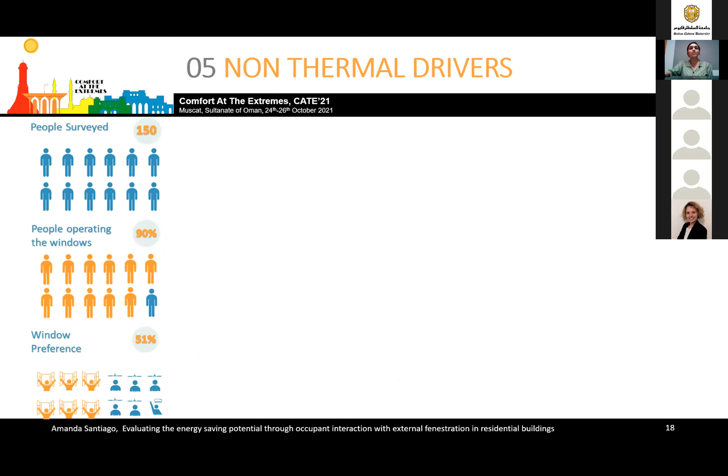Now, to understand these non-thermal drivers, 150 people were surveyed, of which 90% operated their windows themselves. 51% of the surveyed people preferred opening a window to switching on the fan or the air conditioner. Out of the people surveyed, most of them had an independent home. At least 50% of them had one window in each space in their home.

To understand the non-thermal determinants, it can be seen mosquitoes posed as the problem for most homes, followed by dust. However, these determinants varied with time of day. As you can see, insects and mosquitoes pose a problem during the evening and night, whereas security and air pollution pose a problem during the day.

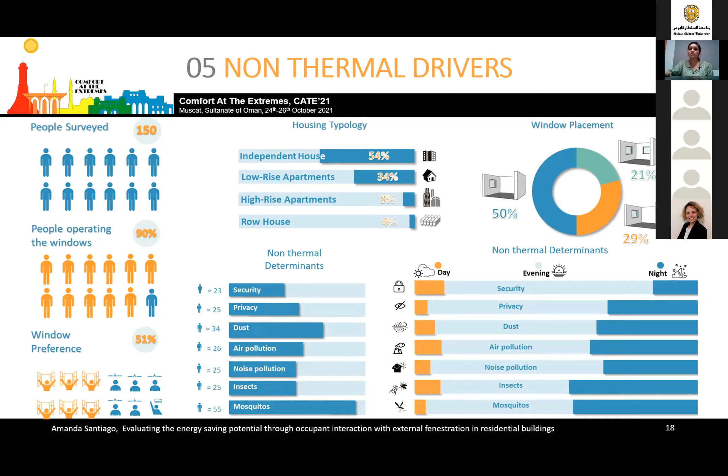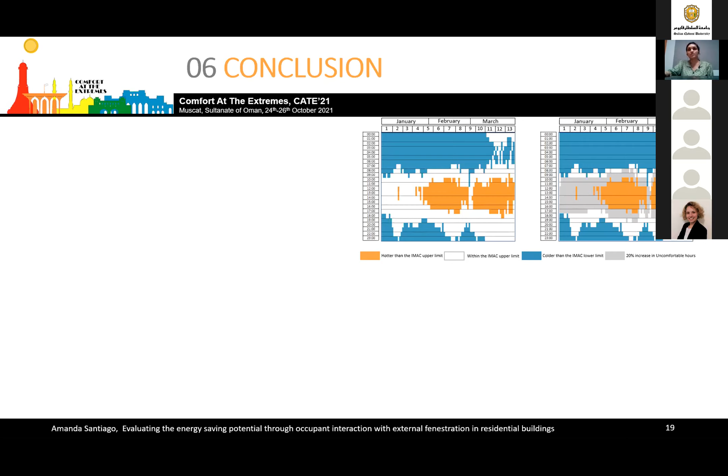I will conclude with what I started. Bangalore, located in India, is a temperate zone and has comfortable hours for nearly 50% of the time. However, occupants do not take advantage of this climate, which results in 20% additional uncomfortable hours. In order for people to achieve their comfort, they tend to switch on a fan or an air conditioner. This increases their energy cost by at least 30%.

It's a clear cycle. The way people operate their windows is directly related to the energy they consume, which directly increases the finance that they spend on the same. People in Bangalore pay a penalty of increasing their energy cost by 30% because of the non-thermal drivers that prevent them from opening their windows.